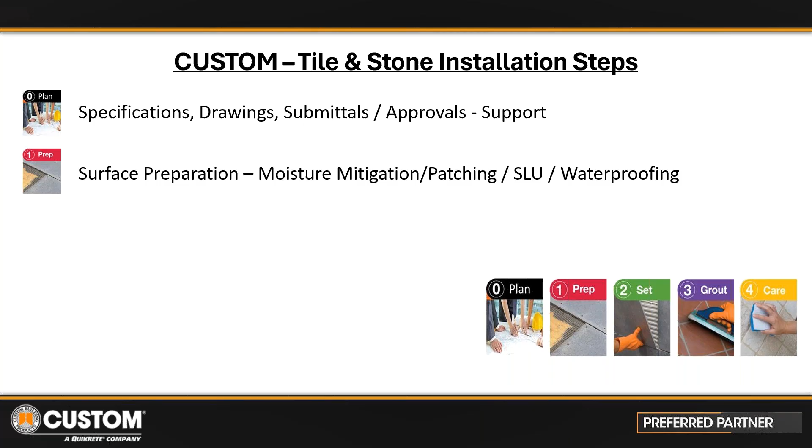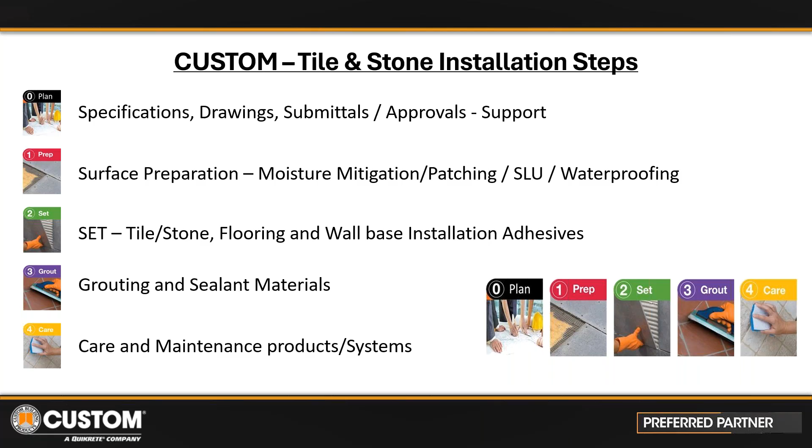Surface preparation products and systems that are designed to overcome and remediate any of the challenges on the projects. Installation or setting, be it adhesives or thin set mortars for tile and stone, complete line there. And then, of course, grouting and sealant materials. And then we can never forget the care and maintenance. Maintenance on the commercial side is still a challenge, but the products and systems are there and everything is relatively simple.

So, developing the specification for auto dealerships. The architects are driving the bus. They own the show. Trying to create a durable and safe space is probably the easier part, but trying to combine that with the aesthetics of a stunning project for the ownership, merging those elements together, definitely can be a challenge at times.

It needs to be appealing, but yet, there are some particulars with auto dealerships, especially the torque on the car tires, not so much the load, but yes, the load, even though it's fairly moderate. Service areas, this is where things can get much more aggressive. Definitely heavier loads, impacts, and then the ever persistent chemical exposures, as well as the chemical cleanup. Definitely needs to be designed to sustain and withstand those elements.

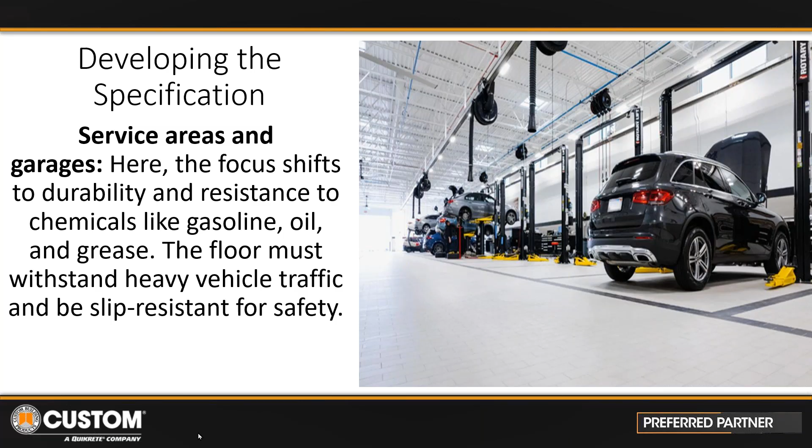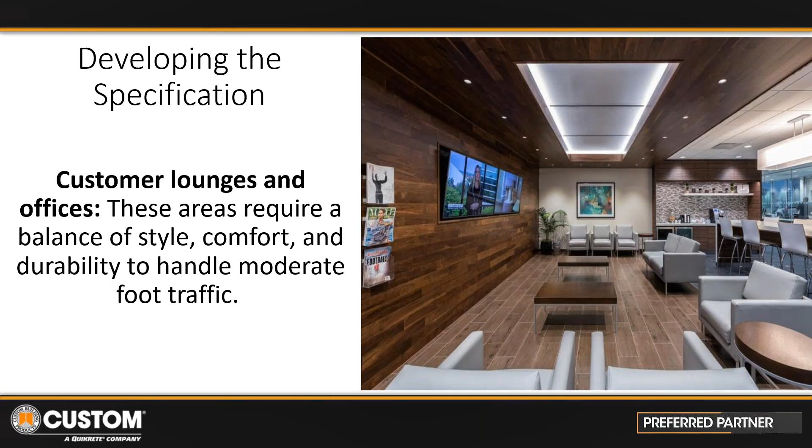There we go. Customer lounge and office spaces, aesthetic, moderate traffic, but definitely needs to be an element that's designed in and integrates with the rest of the space. And then we have qualified labor. So we've got the design, the spec, and now the architect needs to factor in qualified labor. However, there's a challenge there because the architect does not get to control that piece. They don't get to select the bid for the project or the contractor that has submitted it.

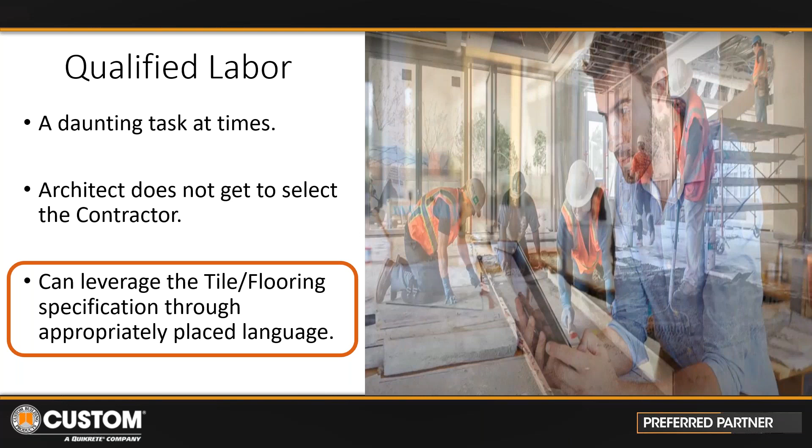However, the architect can leverage contractor selection through the specification by placing qualified language in the right place. So, what is qualified language? Well, it kind of goes back to the NTCA as one organization. They have a 5-star member program. It's actually very rigorous for a company to qualify to get that membership approved. They have to have long history. It's thoroughly vetted. They have to have certifications, insurance, etc.

So when you have an NTCA 5-star member contractor on your project, it should give you a bit of peace of mind that they have the experience and the capability to execute. For the union side, it would be the International Masonry Institute. And for certifications that go hand in hand with 5-star, you've got the Certified Tile Installer Program, overseen by NTCA, but administered by the Ceramic Tile Education Foundation.

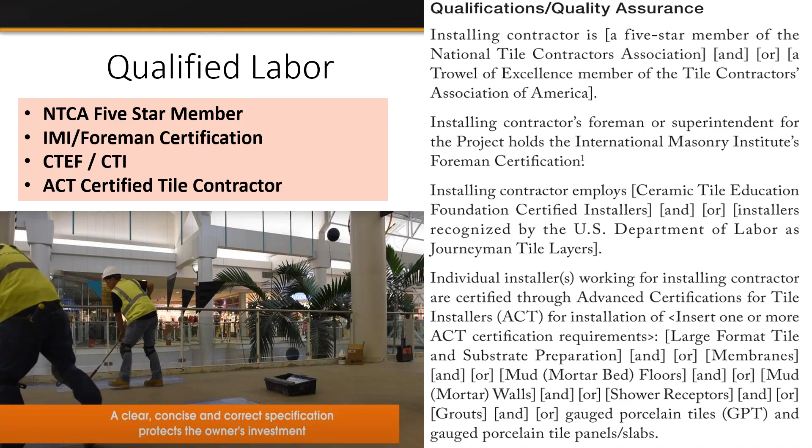And then you've got the ACT Certified Tile Contractor. This bridges both signatory or union and non-union, administered through CTEF and through NTCA. So there are programs out there. There is language out there to help ensure that the project will receive a qualified labor contractor that's been awarded the bid.

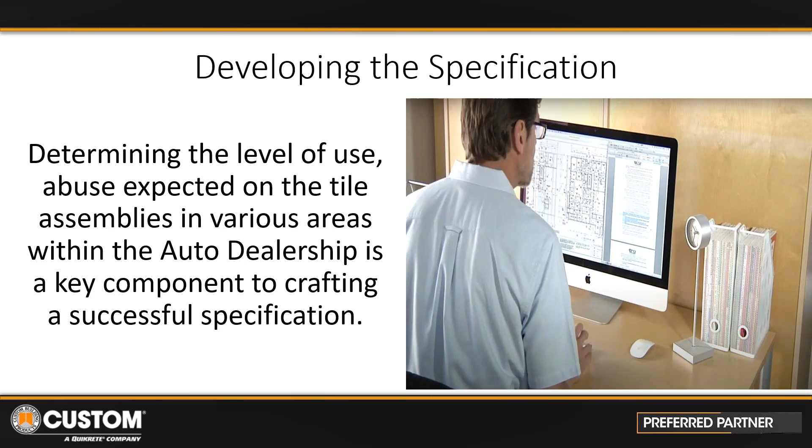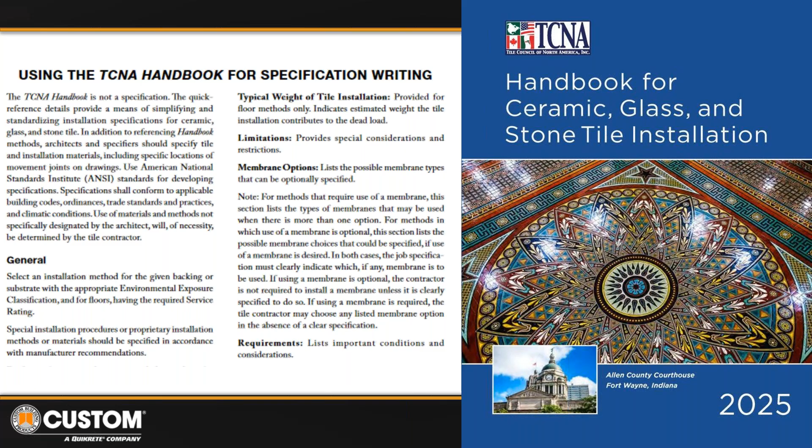So the architect determining the level of use or abuse, as I like to call it, needs to determine a proper specification. So one of the first stops that I recommend is into the TCNA handbook. And you can go to the using the handbook for specification writing, but I'm going to cut right to the chase. There are two key places that can help qualify materials and systems that are suitable for areas of use determined on level of service.

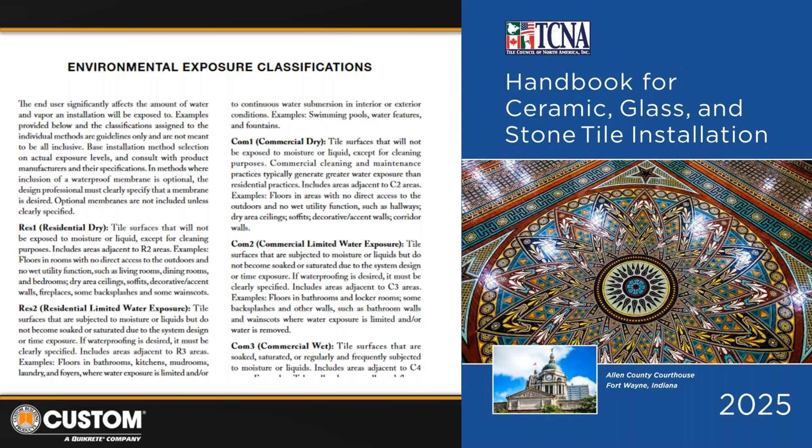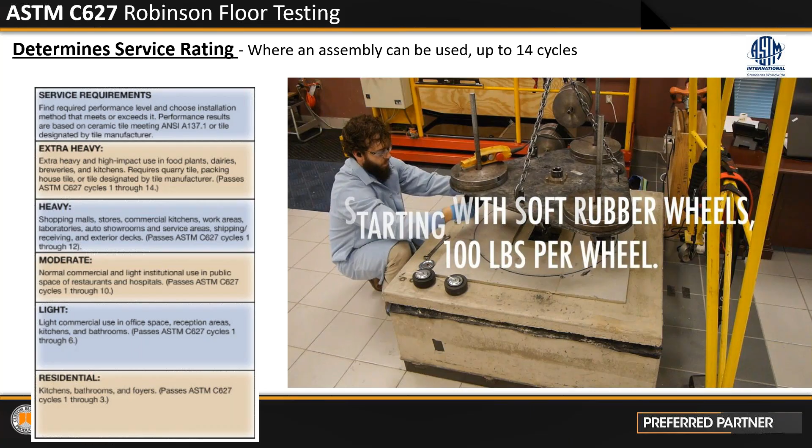So environmental exposure classifications, these are based on moisture exposure and weather exposures. So this will classify your project and then subclassify certain areas based on those exposures. The other is determining the service rating in the TCNA handbook. Now this goes hand in hand with ASTM C627 or the Robinson floor tester. And this is a fairly rigorous test.

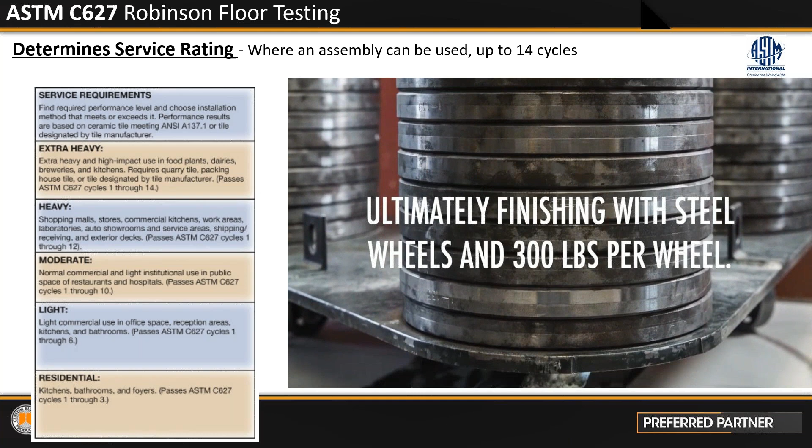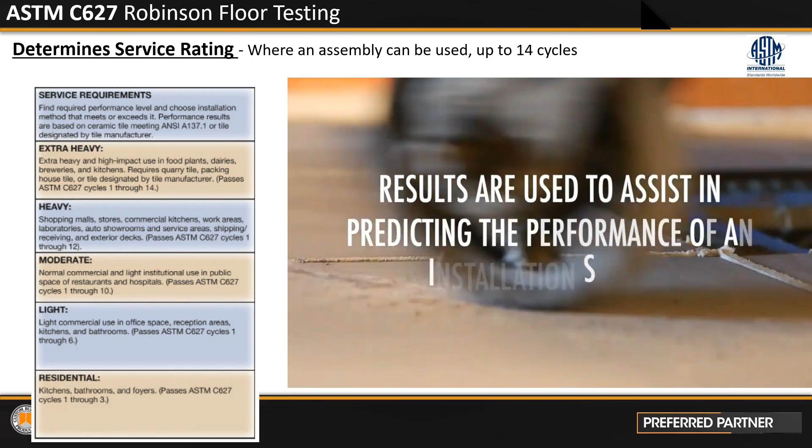It scales up, as you can see, ultimately landing with steel wheels and 300 pounds per caster. And it takes quite a bit for an assembly to achieve all 14 cycles without damage. And then it would be rated as extra heavy. So what does that mean, extra heavy? Well, you can see the classifications broken down.

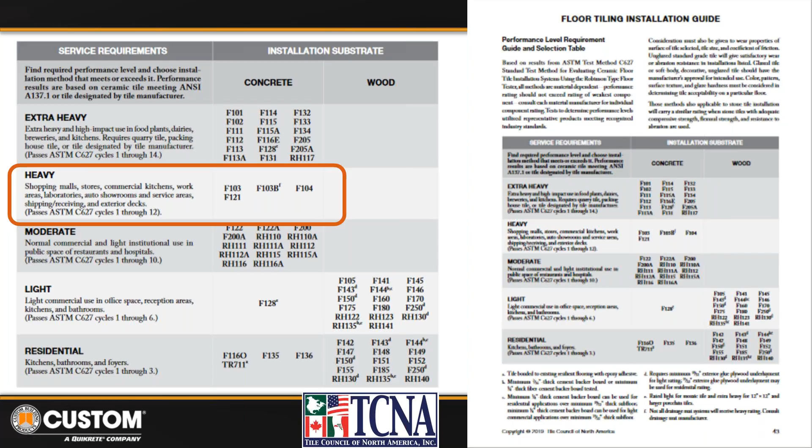So you can see that an auto dealership actually does have heavy impacts on the overall assembly throughout its life cycle, so the assembly needs to be built accordingly. I want you to note that once you leave that light commercial category, wood subfloors are not recognized as suitable substrate.

So wood framing, once we go into moderate and up into heavy, you're all concrete based—on grade, above grade, etc., but concrete substrates. So now the architect needs to think about the tile. The tile needs to be commensurate with the service rating, and typically we're into that porcelain tile category now. So who manages oversight on porcelain tile? Well, that would be ANSI, the American National Standards Institute, A137.1.

So the architect needs to be concerned that it has the internal composition to sustain loading, impact, point, and rolling loads. Also, water absorption needs to be as low as possible to prevent staining or any contaminants building up. Also, the abrasion resistance is a key piece, and then ultimately, the slip resistance.

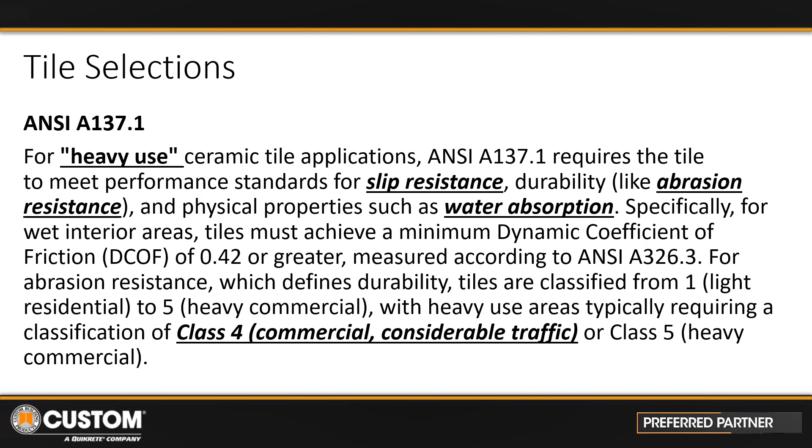Hopefully that's not overlooked, and in most cases we don't find it. However, we do find it intermittently that a tile has been specified and is not suitable for that application because it doesn't meet slip resistance criteria.

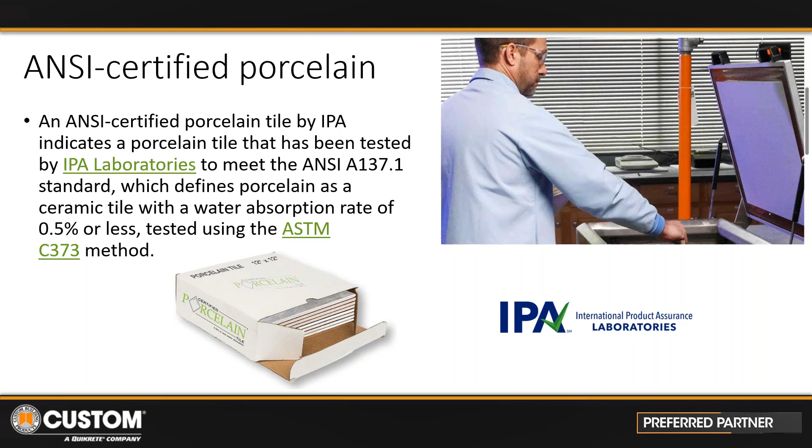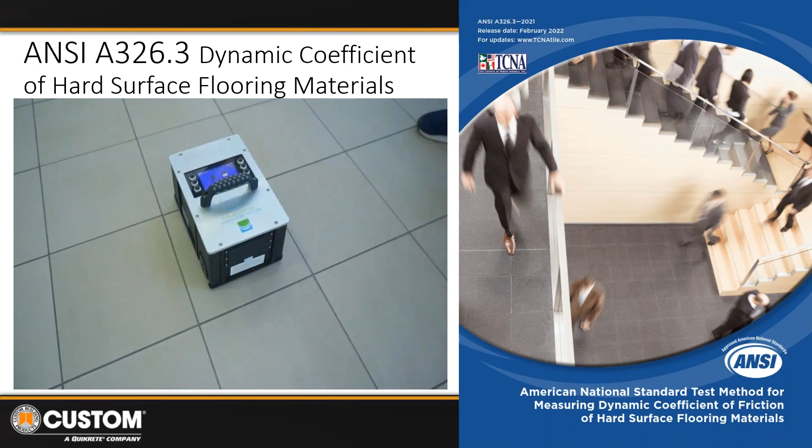Slip resistance, also done at IPA Laboratories, or interestingly and conveniently enough, and why we ran with this, can also be done on site. It isn't specific to tile—it's specific to all hard surface materials. So I'm going to play a quick little video. If you've never seen the BOT 3000 in action to determine DCOF rating, this is it, short and sweet.

When conducting a wet test, we wet the area to be tested. In this case, we'll conduct a dynamic coefficient of friction test. So we'll press the DCOF button and then hit go. The bot makes several measurements and averages them. And now we can take a look at the graph of the results on the screen, and we can print the results.

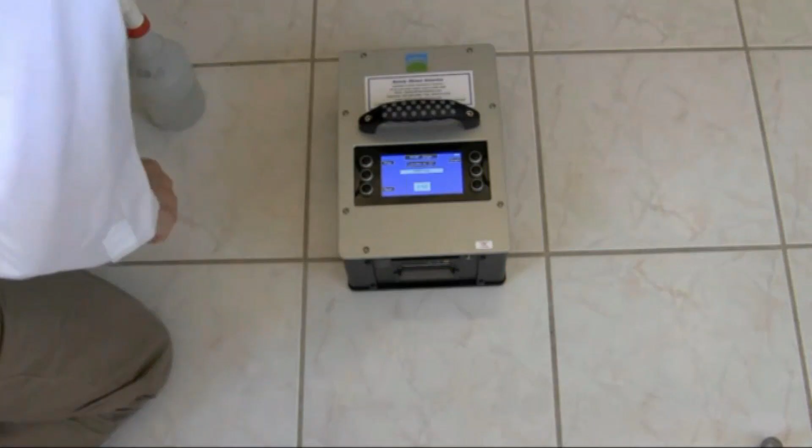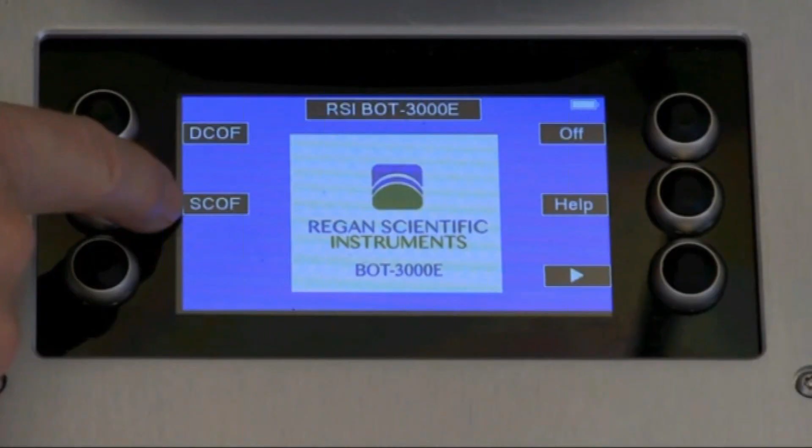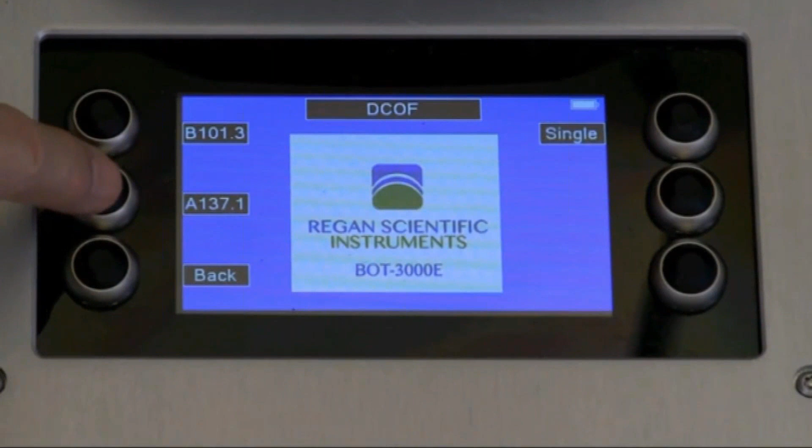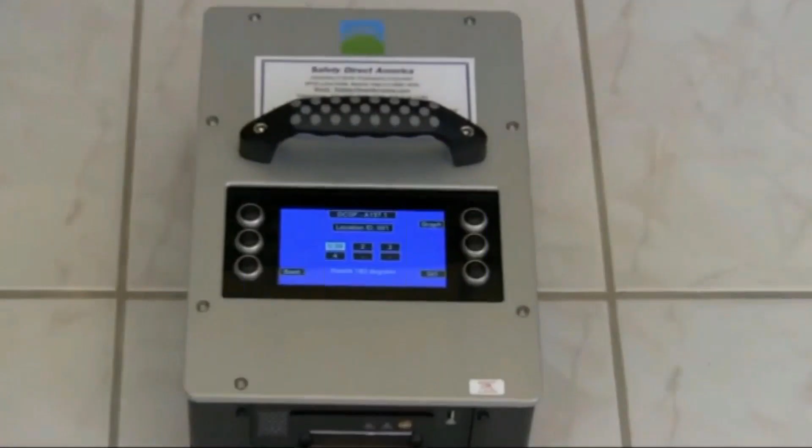The screen display takes us step-by-step through the process of running an official American National Standards Institute, or ANSI, test. Pressing any button turns on the display, and then we have a choice of either running a static or dynamic coefficient of friction test. Let's choose dynamic, and then let's run the ANSI A137.1 test method, which is the official test method for testing indoor flooring according to the latest 2012 International Building Code. Press go, and it makes its first of four runs. We then reposition the bot according to the on-screen directions, which is telling us to run the test again in the opposite direction, or rotate the bot 180 degrees. When we've completed all four runs, we have completed the official test method.

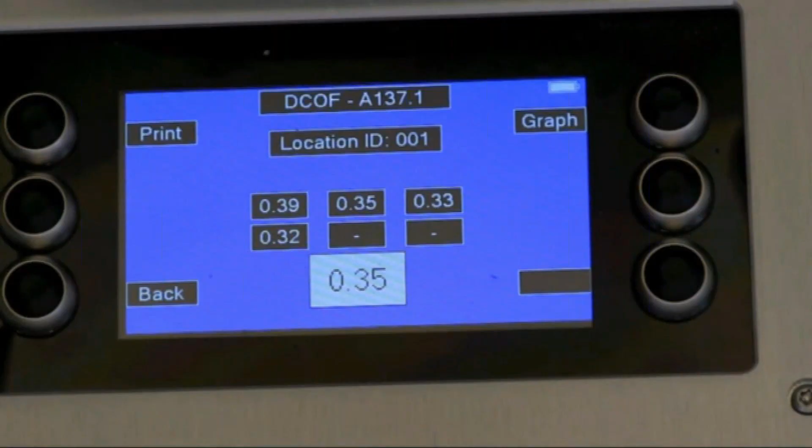And there you have it—data points, printouts, whatever. So that brings us to the standard, which is now ANSI A326.3. And by the way, that is a free download. You can go to the ANSI or the TCNA websites and download that for free.

So now we have categories broken out and DCOF requirements, both wet and dry. You can see here for auto dealerships, showroom would be dry and level interiors. Wet level interiors would also be applicable—cafeterias, restrooms, entryways, etc. And then exterior applications would be service bay reception areas for vehicles and pedestrians, as well as any exterior showcase areas that have a tiled finish.

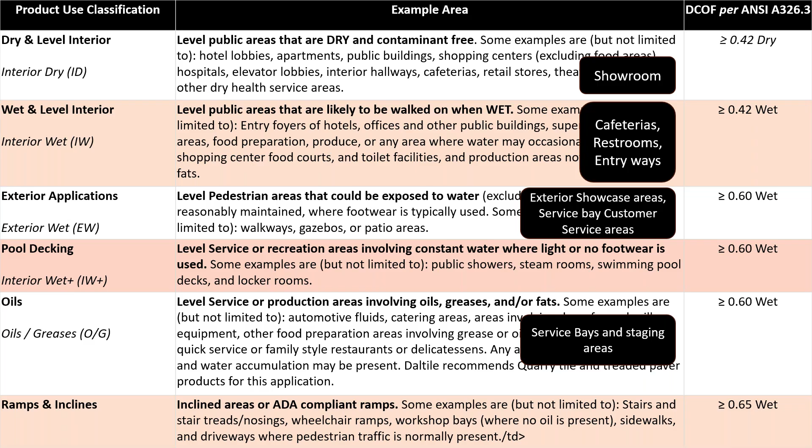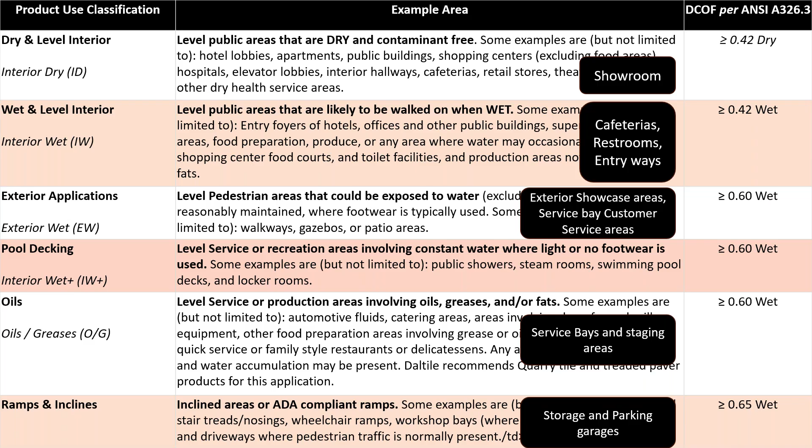And then oils—you have oil contamination, fluids, etc., which are different than just water. So it's nice to have a rating there, makes sense. That would obviously be applicable to the service bay areas in auto dealerships. And then ramps and inclines, also applicable, and you can see the higher rating requirement. So all makes sense, very sorted, and should be applied.

Now I want to move to the concrete. Let's talk about concrete—why concrete isn't flat when the floor covering installers get there.

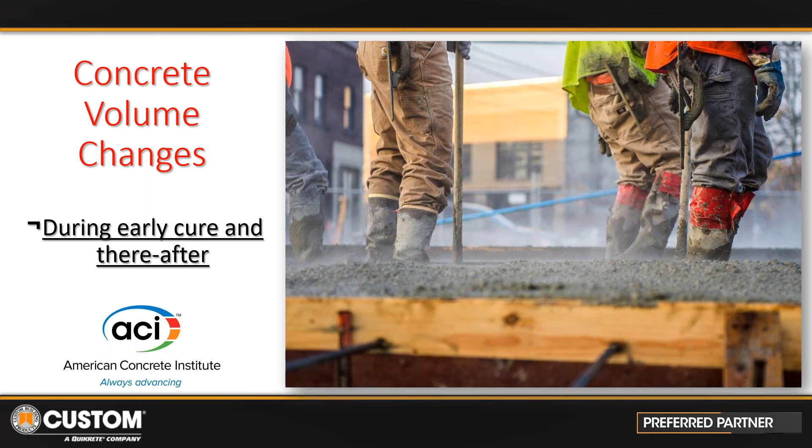The American Concrete Institute recognizes that as concrete hydrates, it loses moisture and generates heat of hydration, so there is movement in the concrete right out of the gate. You get an expansive nature initially from the heat of hydration, and then contraction thereafter based on water loss and continued hydration of the cement in the concrete.

What does that mean for the floor finish? It means plastic shrinkage, and ongoing plastic shrinkage, continually takes place under flooring assemblies, not just in the first 2 months, 6 months, or even 18 months. So materials that we specify are designed to address that ongoing plastic shrinkage we expect in the concrete slab, whether it's on grade or above grade.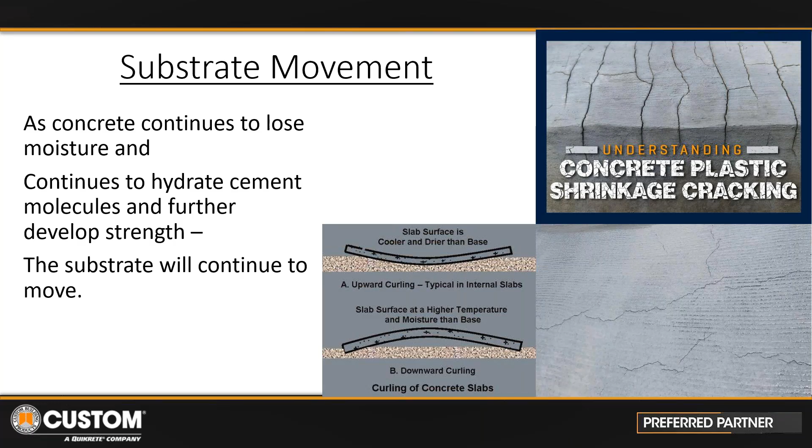Curling can happen as well, and we'll talk about that shortly in the remediation conversation.

So what are the requirements for the substrate? It can be quite lengthy, and it's covered in ANSI and also in the TCNA handbook. But to make it short and simple, it needs to be sound and stable and free of any contaminants, including surface applied or integral curing compounds that could prevent adequate adhesion to the concrete slab.

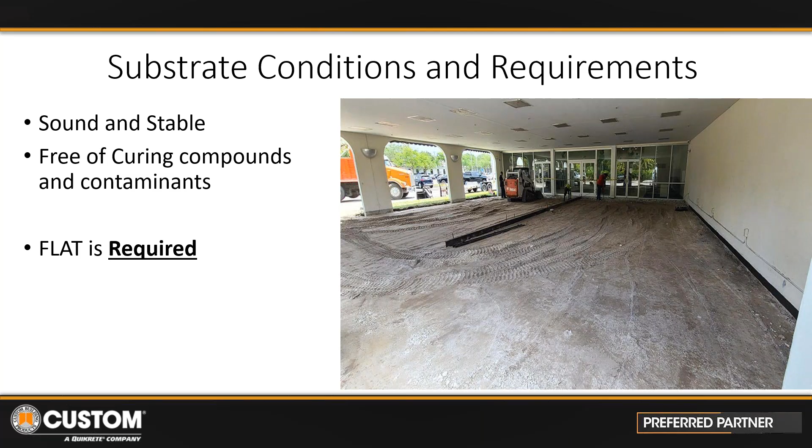For soft goods or resilient flooring, carpet tiles, it's going to be 3/16 of an inch gap under a 10-foot straight edge minimum. Understand that manufacturers' requirements will trump the industry standard requirements, and typically they're either in alignment with, or may be slightly more stringent—some resilient floor covering manufacturers, because of the size of the module, may require a 1/8 of an inch gap, meaning it must be flatter than 3/16 of an inch under a 10-foot straight edge.

So how do we get there if the concrete's not flat? We're going to use self-leveling underlayments, or as we like to call them in the technical committees, flowable hydraulic cement underlayments, because that's what they are.

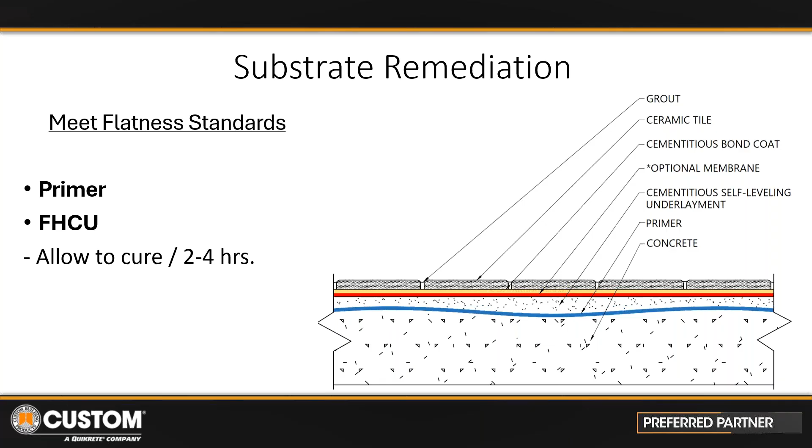And then from there, after a job site assessment, level spaces can be made with these products, and typically cost more money. So this is how we remediate the slab—we fix that concrete, we make it flat by using these products.

Now, bonding mortars, just a quick flyover. There are two different categories of bonding mortars, based on strength and performance. Your entry level, ANSI A118.4 modified dry-set cement mortars, do have polymer modification to help assist bonding to porcelain tile, offering some nominal levels of flexibility for ongoing movement, but their shear strength requirement is greater than 200 PSI. When you think about it, that's quite a bit of strength—bonding a 12 by 24 tile to a concrete slab, you take the 200 pounds per square inch and average it out, and it takes a lot of force to move or break that tile and shear it from that bond.

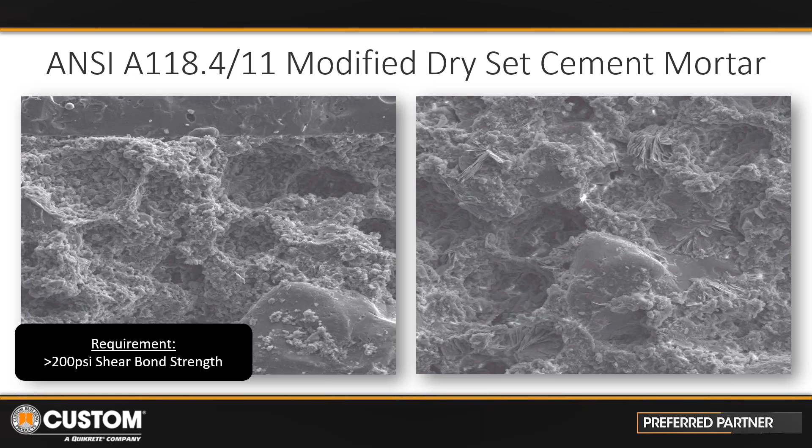However, these are entry level. This is not what we would recommend or specify for the heavy service requirement of an auto dealership. We would instead specify an improved modified dry-set cement mortar. What does that mean in nuts and bolts? It means you're going to get double the performance in terms of shear bond strength.

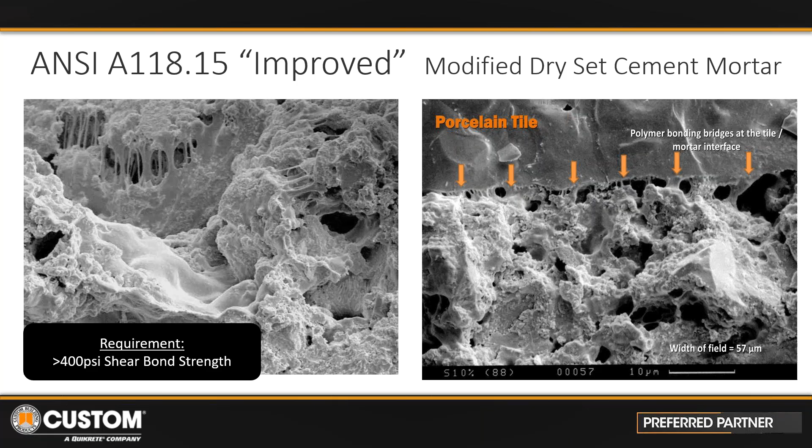But I think an added advantage, and maybe even more important, is the higher polymer loads, which give the overall assembly the capability to move with the structure. So as walls, floors, and concrete continue to move with thermal cycling, expanding and contracting from weather and temperature conditions, these are the bonding mortars that give you the most performance to address those service conditions.

So let's go into showrooms and cut to the chase, will you?

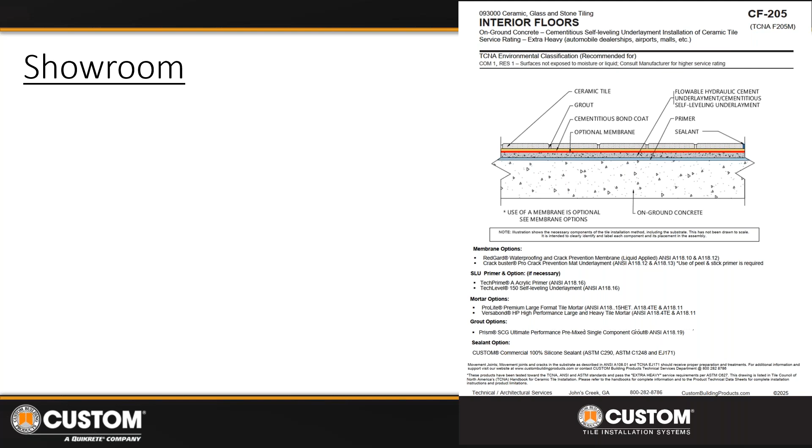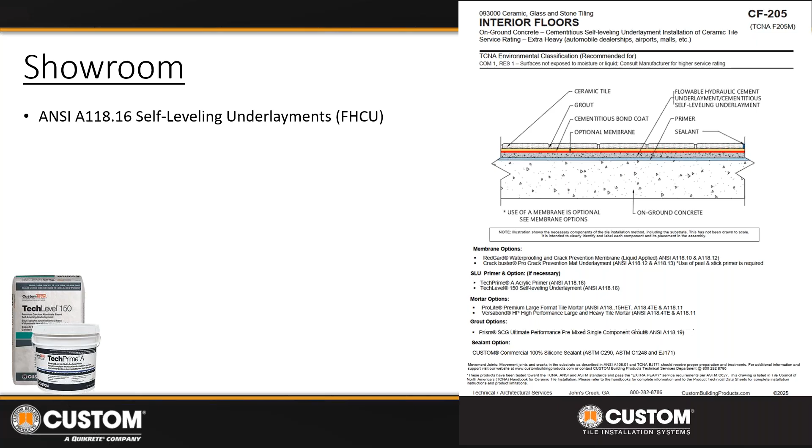So for on-grade, bonded on-grade applications, we would remediate with the self-leveling underlayment, that's ANSI A118.16. Don't forget the primer, primer always goes with your self-leveling underlayment. We would specify a bonded crack isolation membrane that helps mitigate stresses from that ongoing concrete plastic shrinkage, and then we would use that improved modified dry-set cement mortar as the bonding mortar.

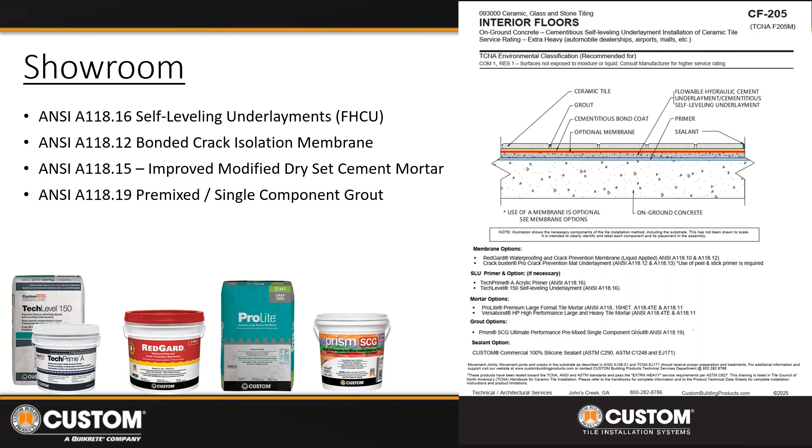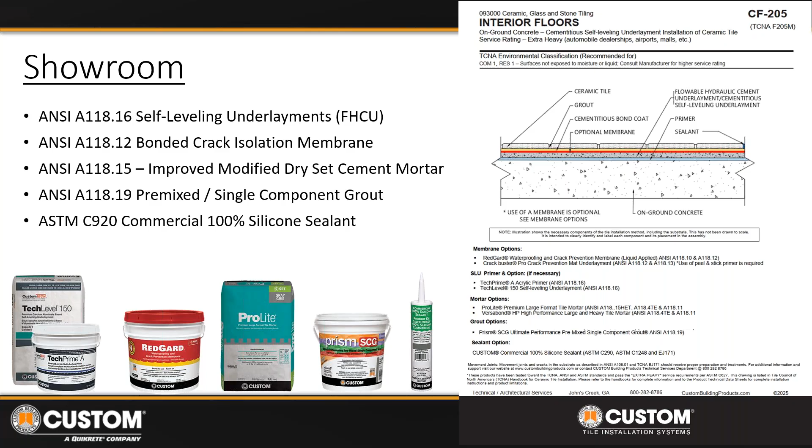And then for the showroom, we would recommend using the new pre-mixed ANSI A118.19 category, but not a new product—these products have been around for over 12, 13 years now. So a lot of history, a lot of improvements, but these products don't require sealing. And because they don't require a sealer-type application to prevent staining, they won't stain from your average contaminants, your household or office type contaminants, coffee, etc. And then of course we would specify an ASTM C920 commercial silicone sealant for your perimeter movement joints and your integral movement joints, which we'll get into shortly.

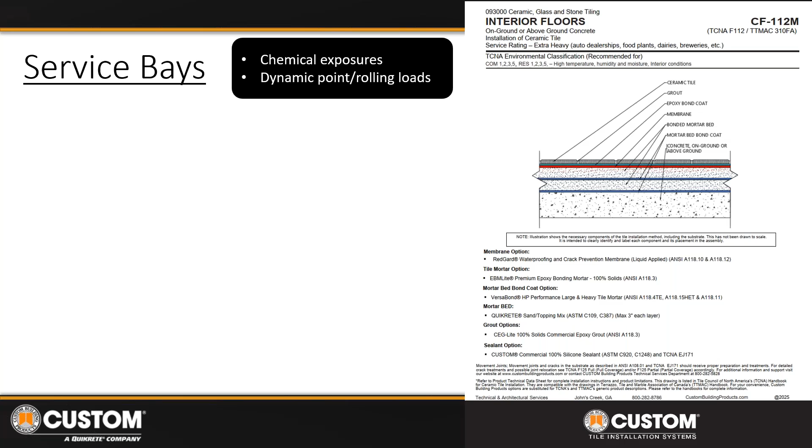Service bays—this is where the abuse takes place. So first of all, we're going to need a slope to drains. Create some slope, we don't need flat. We need flat, but we also need slope to drain. So to get there, we'll use a polymer modified mortar bed that meets ASTM C387 and ANSI A108.01.

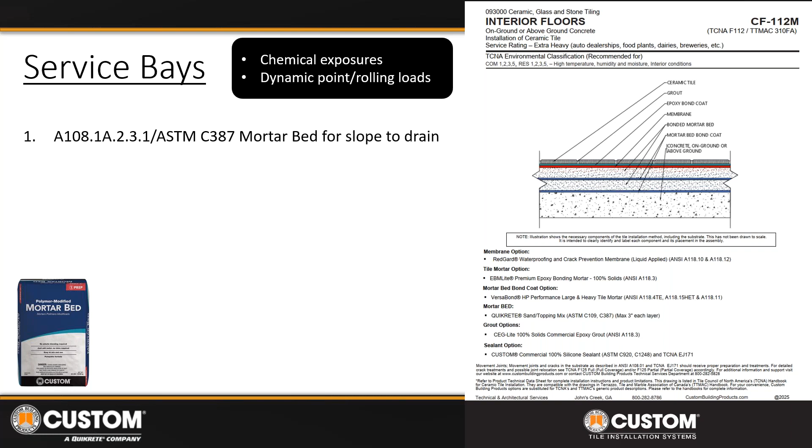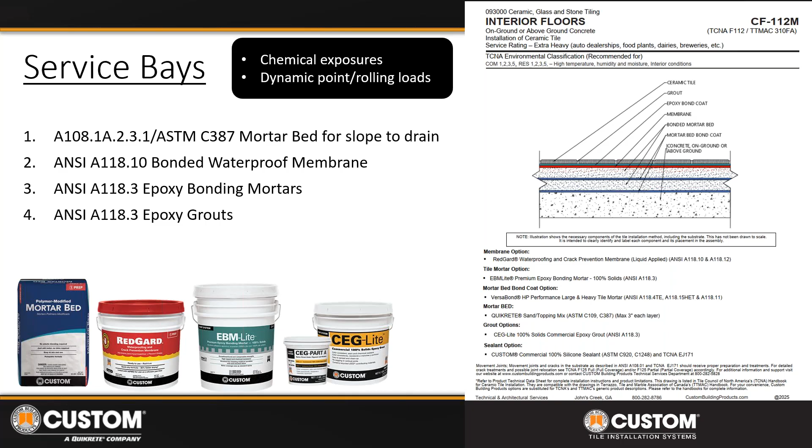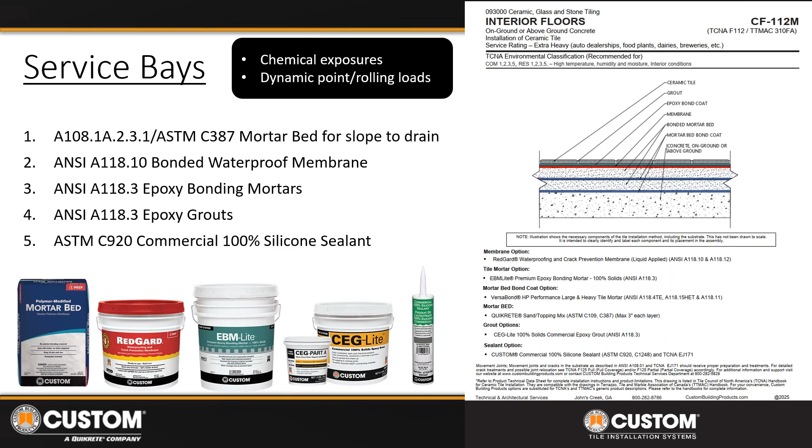Then we would recommend the waterproof membrane, ANSI A118.10, and then we would get into epoxy bonding mortars. We could use an improved modified here, but it's all based on anticipated chemical exposure. So for high chemical exposure, we would recommend epoxy bonding mortars that meet ANSI A118.3. And then ironically enough, the epoxy grouts would be the recommendation as well, again for that chemical exposure, within the same category, ANSI A118.3. And then back to the ASTM C920 commercial 100% silicone.

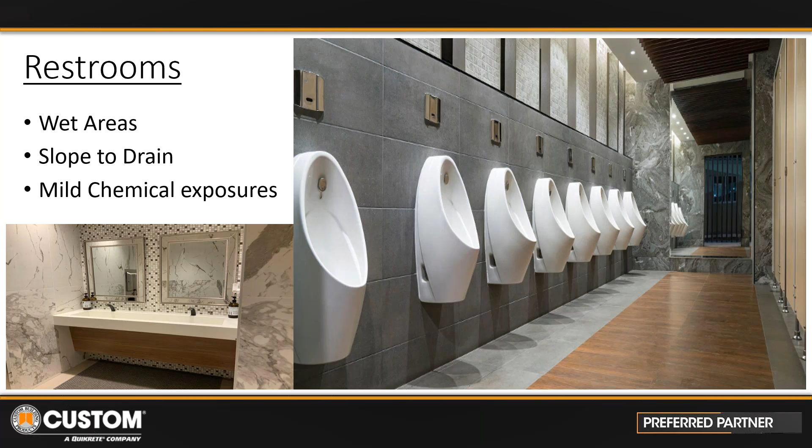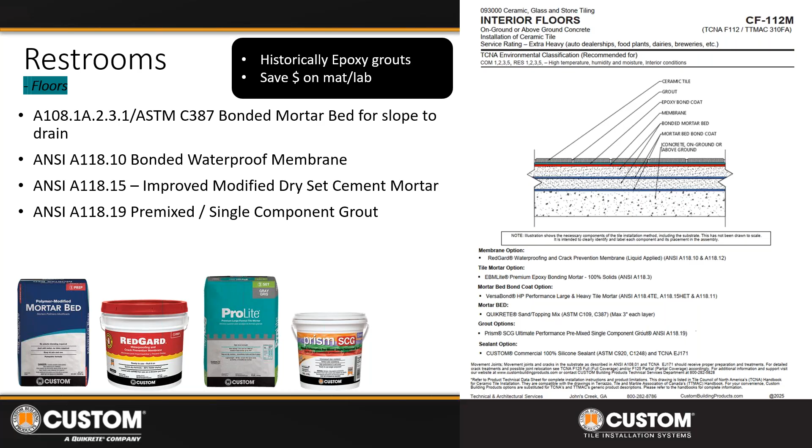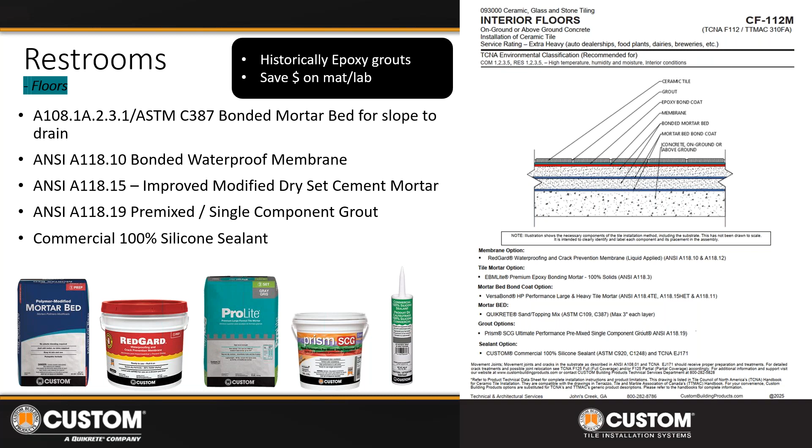Restroom areas—so this is wet or intermittent wet areas based on maintenance protocols. But there is some mild chemical exposure from the human element and from the cleaning element. So here we would also recommend a bonded mortar bed for the floor applications to create that slope to drain, a waterproof membrane as well to protect the assembly, and then the improved modified dry-set cement mortar, a pre-mixed single component grout here instead of, or in lieu of, epoxy. So historically, we would use epoxy in these areas for that chemical exposure, but we know that since it's in a mild category, those pre-mixed grouts can sustain there and will prevent staining and saturation into the assembly. And then your commercial 100% silicone sealant as well for your movement accommodation.

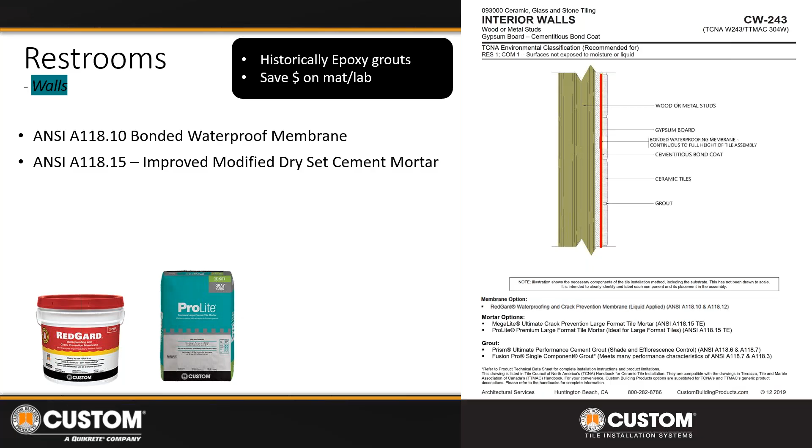For the walls in the restroom, bonded waterproof membrane at the very least to meet code, if not complete to the top of the tile assembly to protect wall cavities. And then the improved modified dry-set cement mortar, a pre-mixed single component grout, also saving money on the epoxy. And then the commercial silicone sealant.

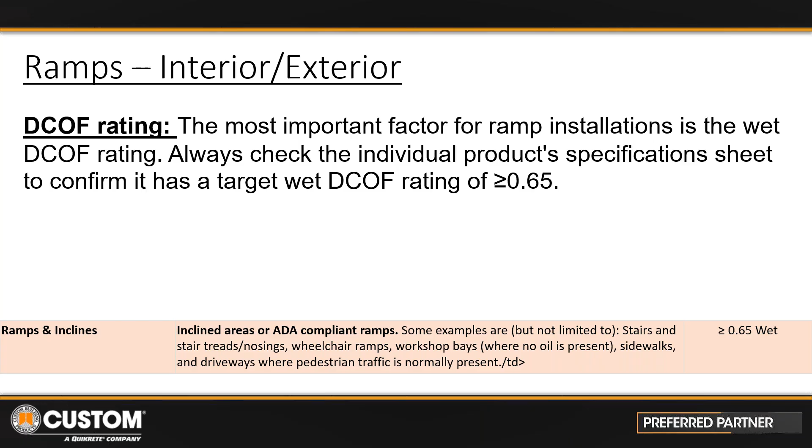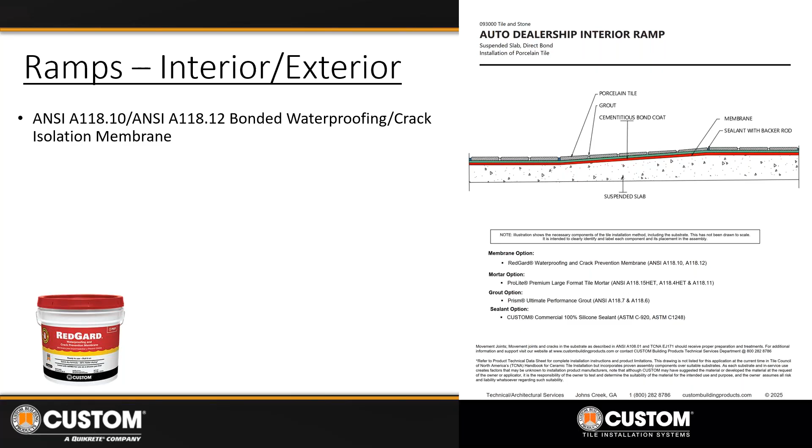Now for ramp and exterior, even interior ramps, like in parking garage, service bays, etc., we want to remember that we want to use the DCOF rated tile that meets those areas of need. So auto dealership interior, external, we would use a mortar bed if needed. Then we would use a waterproof membrane and an improved modified dry-set cement mortar. And here for exterior service conditions, we would turn and recommend a high performance cement grout that meets your budget needs and gives you the best performance. Epoxy would be a bit of an overkill here. So that would be the recommendation, along with your silicone sealant.

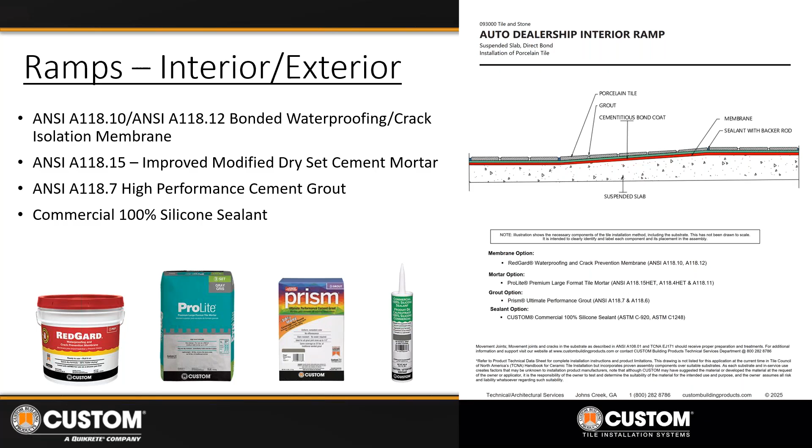Your financing and insurance departments in your auto dealerships, well, they would be the same specification as a showroom—they see the same service conditions.

But let's get to maintenance, kind of a key piece here, one of the most overlooked. Don't ask me how. We write tons of these maintenance schedule specifications with product recommendations on auto scrubber machines, brush heads, etc. And if they were used, they would never have an issue. But we still see a gap.

We see janitorial chemicals being used that are improper. They're highly alkaline or highly acidic. Both, if you go either way, are equally corrosive, not only to the grout, but to the tile.

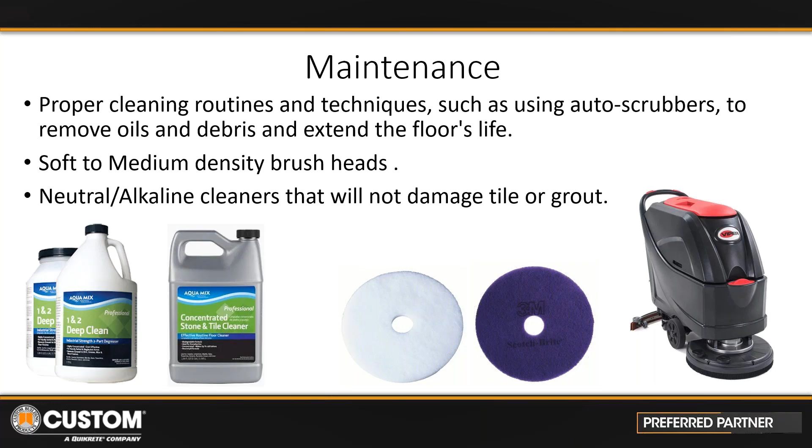So focusing on your maintenance schedule and specification is key to maintaining warranties, protecting the ownership, and making sure the maintenance schedule makes its way from job site closeout documentation into janitorial's hands so they know what they should be using for that application.

Speaking of submittals, this is a key piece. The architect does all the work to specify. The manufacturer, working with the selected contractor, the awarded contractor, can put together a submittal package, making sure that all the products we just went through meet those suitable service ratings and are in compliance with the architect specification.

This includes letter of intent or warranty drafts, detailed drawings for all those different spaces we looked at, technical data sheets, and safety data sheet submittals for all of the products, health product declaration documents for all of the products, and GREENGUARD documentation certificates that outline these products are low to no VOCs and meet requirements, guidelines, and are sustainable.

And LEED documentations. Now, LEED documentations have to be done on a project-by-project basis because it's relevant to the project location and the manufacturer's location. And for that reason, we have an online portal submittal process for that, so you can self-serve or contact your Custom Building Products representative and they can help you with that for your project.

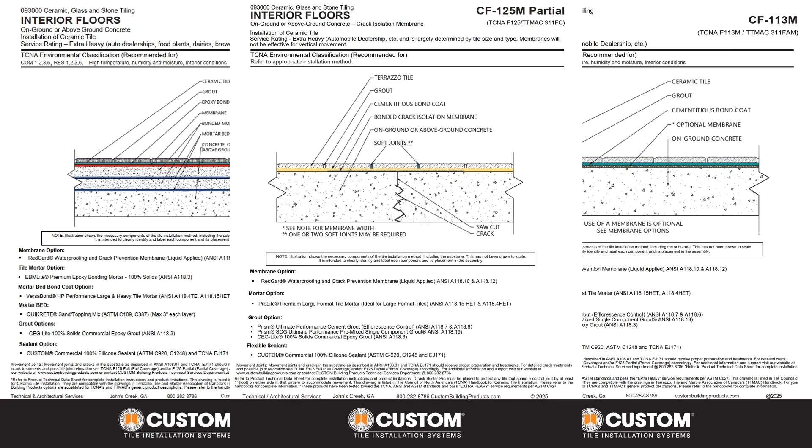Drawings can be generic and emulate or mimic TCNA drawings, or they can be customized as needed. So you can get with your custom rep to have those done.

We have an installation challenge and solutions white paper that we put together specific to auto dealerships, relevant to this conversation. It touches on a lot of the things I've already covered.

And then the submittals also include the technical data sheets, the SDS, the HPDs, the GREENGUARDs, and we touched on the LEED documents. So done correctly, with specification written correctly and qualified labor, NTCA 5-star member.

But it's true. Built correctly, a tile life cycle would be 75 years and could definitely last that long, but nobody's going to want to wait that long. And the nice part is, done correctly, in most cases we can put tile directly over tile.

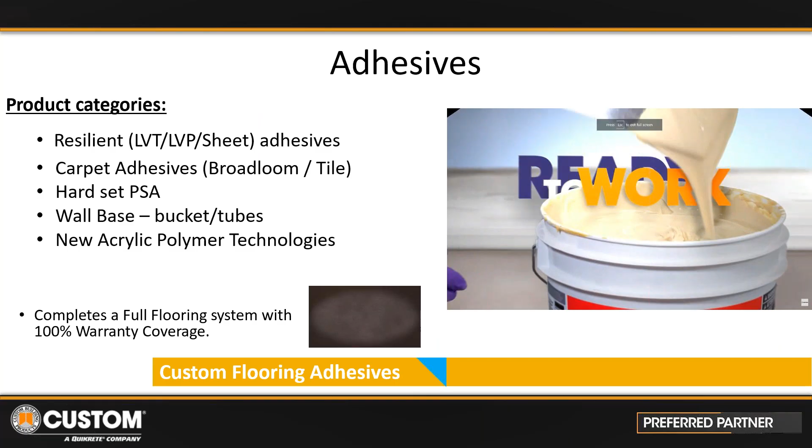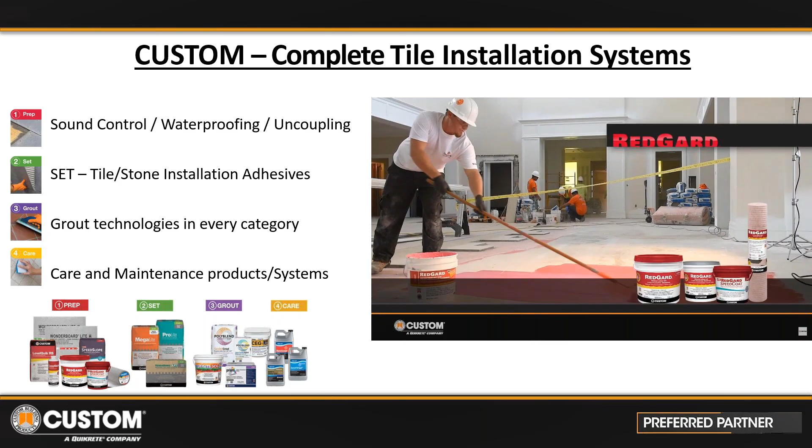So in our custom portfolio, we have the surface prep products that I covered. We have adhesives for soft goods sides, wall base, FRP, wallboard, etc. And then we have our well-known tile installation line to support your auto dealership specification needs.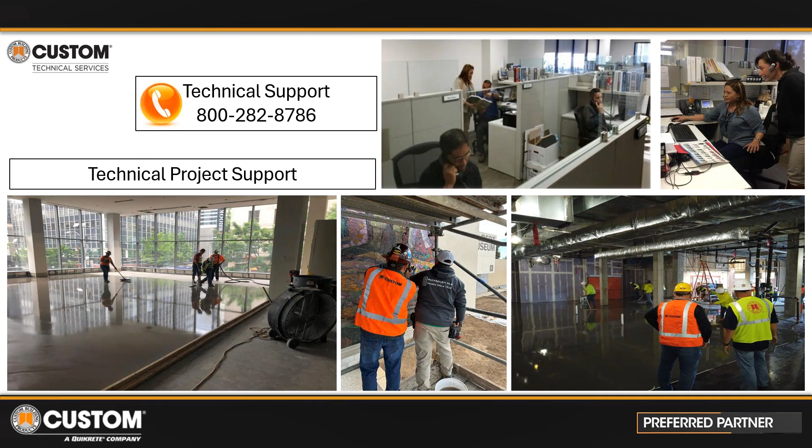And along with that, we get the architectural support I've just covered. And most importantly, when it comes to that qualified labor piece, we have great relationships with qualified contractors all over North America. And we spend a lot of time at mock-up stage and pre-con meetings to make sure they're comfortable with the spec, the submittal, and the products for use and systems on that project.

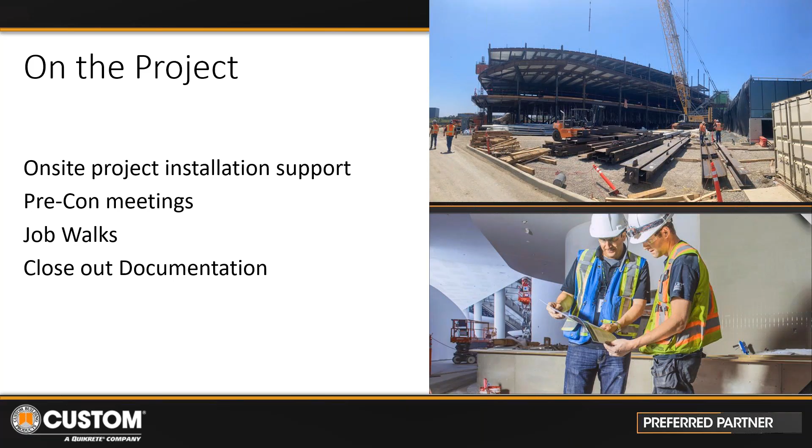We have our mobile app, our website, where you can navigate and get all of this information. And then we have our lead site for those submittals we talked about. We have YouTube channels for the contractors and their crews to brush up on using our products and systems.

And then we have an online training learning management system that's self-register, self-paced, self-reporting, and you can access this right through our website portal. We put a lot of effort into this. It's standard-based, not selling-based, so there's a lot of valuable information there, even for the architectural and design community.

And then, of course, last but not least, and most importantly, our relationship with the National Tile Contractors Association. We value that greatly, and we participate in as many of the programs and trainings that they offer across the country.

If you're not aware, please log in and look at their events calendars. They've got, I don't know, over 100 sessions between workshops and regional trainings annually, and it's very, very valuable not only to the contractors, but to the architectural and design community as well.

So with that, Jim, if you're still with me and you're not napping or having a bite to eat, I'll take any chat questions if we have any. I was pretty thorough, but let's let them fly.

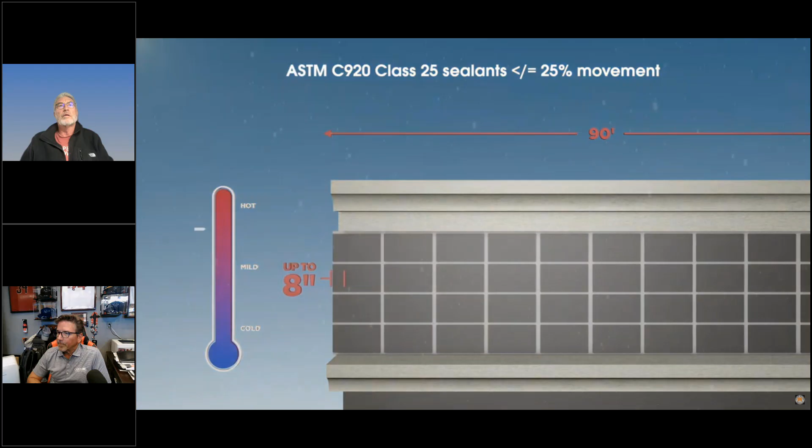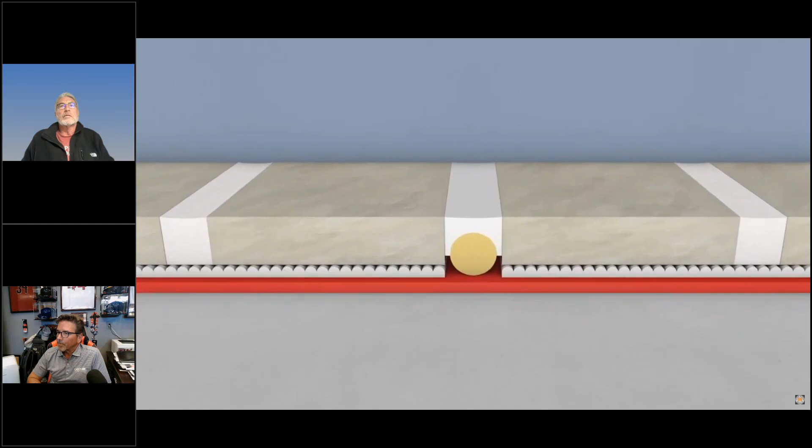So soft, flexible joints within the tile assembly will help accommodate the inevitable expansion and contraction. Movement joint fillers will absorb compression during expansion, whereas tile and grout are just not designed to compress. Flexible sealants will return to the original size after compression from tile expansion over and over, day in and day out, and this we refer to as cycling. Throughout this video, we'll be turning to detail EJ171, movement joint guidelines in the Tile Council of North America's handbook, to get more information on these details.

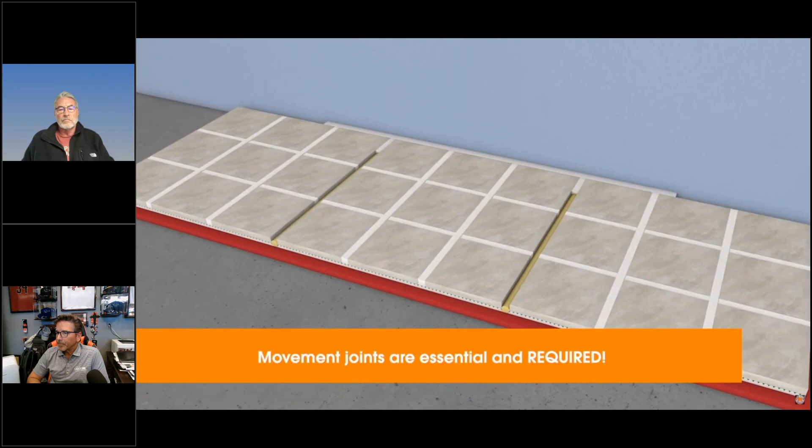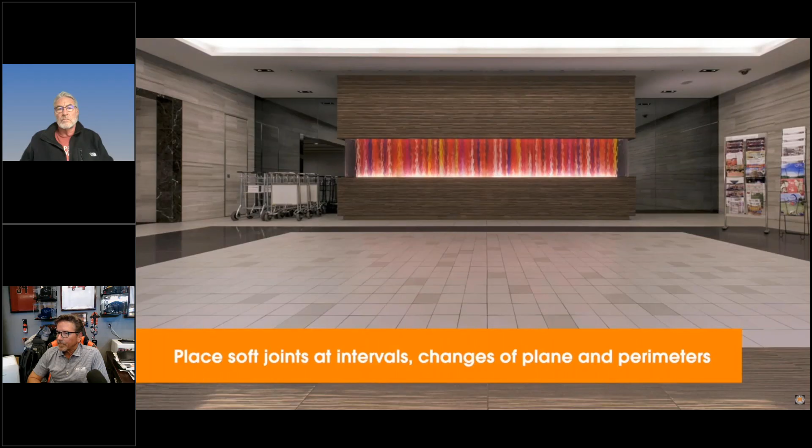EJ171 begins: perimeter and field movement joints within a tile installation are essential and required. That phrase is the single most important takeaway on this topic. These soft movement joints are installed at changes of plane and set intervals based on project conditions. Joints in the slab are also honored when carried up through the tile assembly. So give your tile these breaks or they'll break later on their own.

And there you go. Excellent. Point out that I didn't cover the movement joint piece. I apologize, but thank you. And now we have. Will, I'm going to say that you did a great job, and we have no other questions at this point.

I want everyone to know that if you do have questions, you can contact your manufacturer's technical department; they can answer those questions for you and make sure you're doing it the right way. Absolutely. We have conversations with architects quite often about this subject, so we'd be more than happy to jump in at design stage or pre-con and make sure those are addressed and plugged in appropriately.